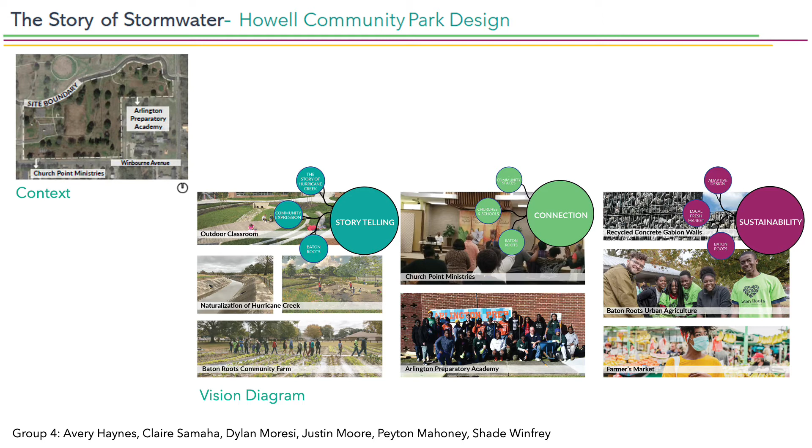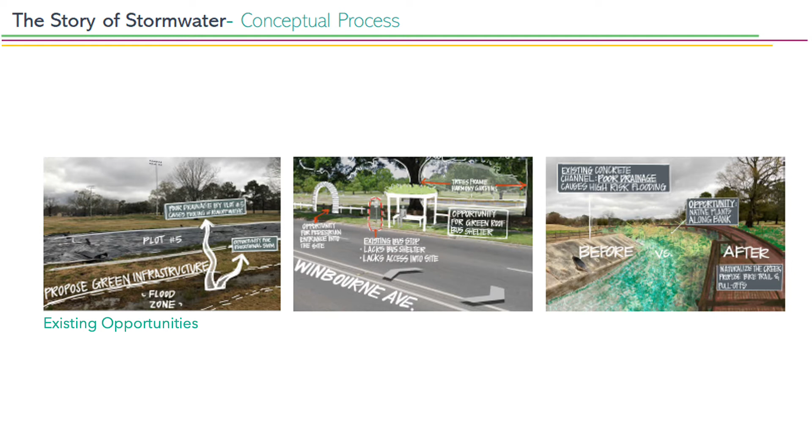The last is Hurricane Creek, its naturalization, which will provide opportunities for recreation like bike lanes and fishing, as well as improving water retention, slowing stormwater, and being a place for native plantings.

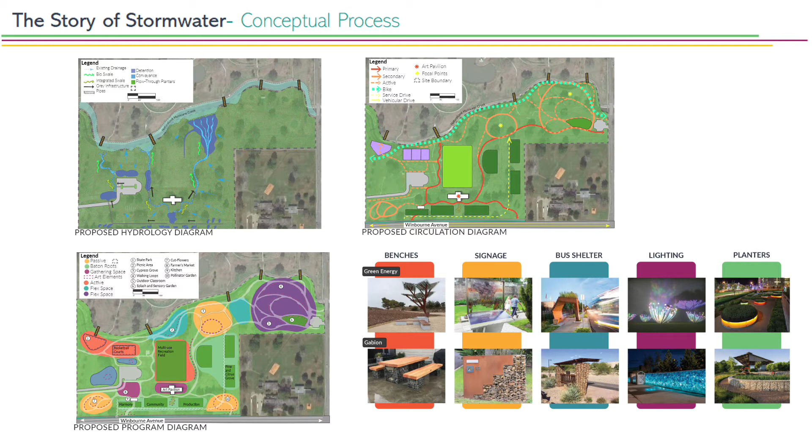The art matrix shows options for green energy and gabion furnishings and how they could be used throughout the site.

Our master plan is a composite of these layers of hydrology, circulation, and programming through an iterative process with various changes, taking feedback from community members and representatives from BREC, Baton Roots, and the NEA.

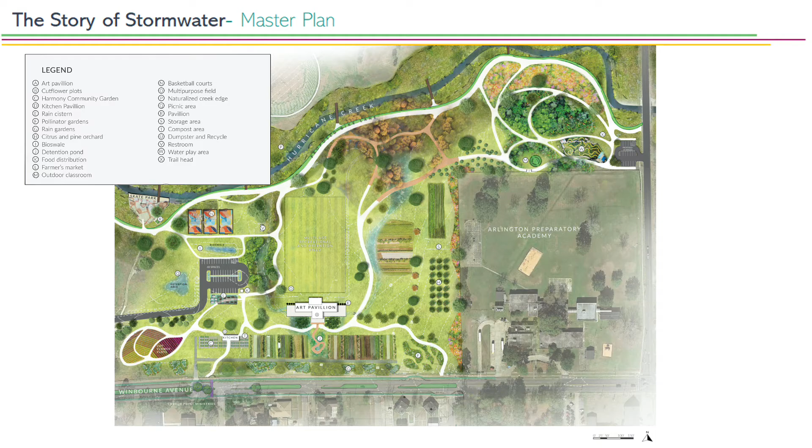We've arrived here. The Story of Stormwater master plan design utilizes dendritic forms to convey storytelling, connection, and sustainability within the space. We've divided the master plan into 3 sections.

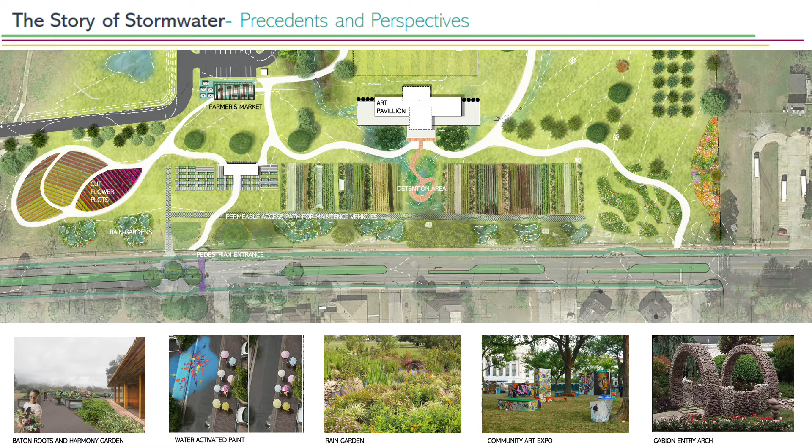The farmers market could also include a community art expo, and we would really like to focus on a pedestrian entrance, which would engage Church Point Ministries as well as members of the neighborhood wanting to access the park.

Our design proposes the art pavilion nestled between Winbourne, the Baton Roots plots, and the multi-use recreational field. This would give second-story users a great view of a soccer game or of the community plots.

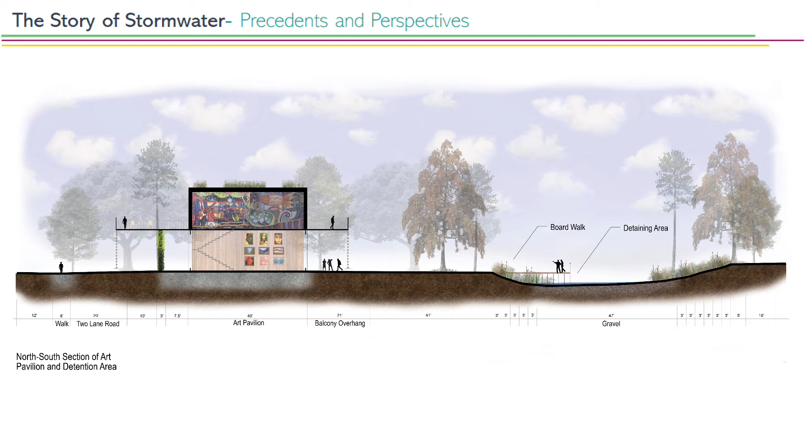There's also a nice detaining area with a boardwalk that separates Baton Roots' community plots from their production plots. The second section of our master plan shows a more active side.

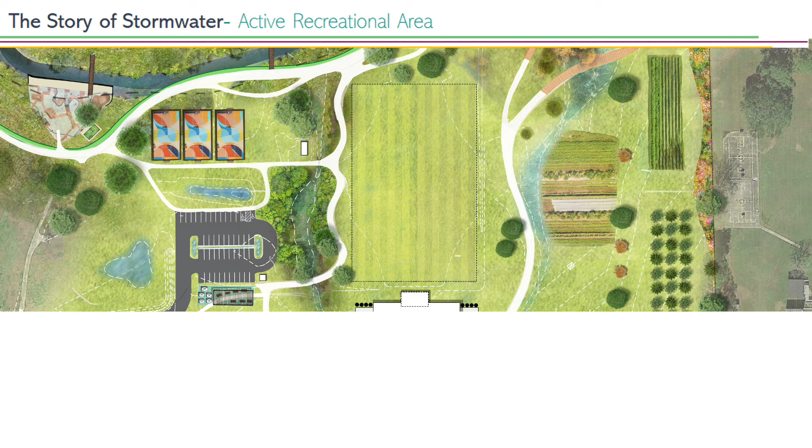There's the multi-use recreational field that's existing, as well as some additional basketball courts, a really cool skate park with a teen pavilion, and to the right, more Baton Roots plots, but with a focus on production.

Most times, parks focus a lot on young children, but they always forget about the teens. This section of the park would really like to highlight a space for teens in a cool art skate park.

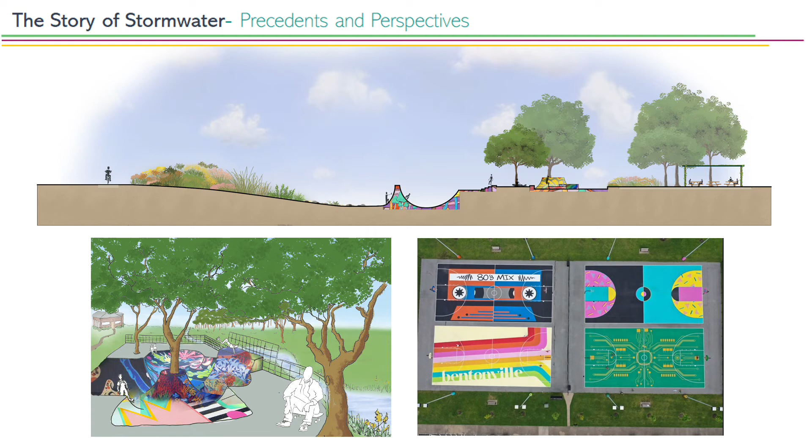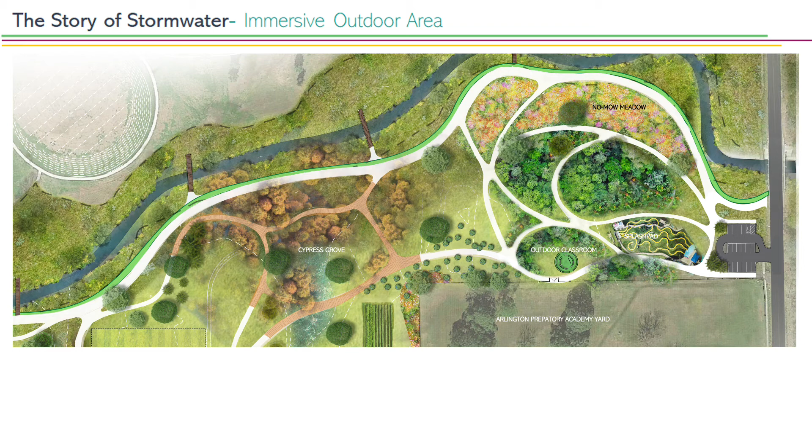would serve as a space to engage the Arlington Preparatory Academy students, and a splash pad could also be a fun way to engage children and learn about stormwater management.

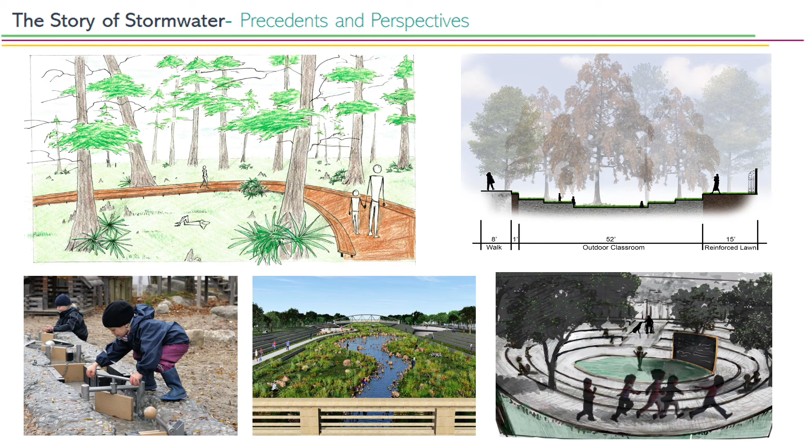Our focus on connection drew us toward the street. Making Winborn safer and more effective for pedestrians, bikers, and bus riders was our goal.

We've provided a road diet to make the vehicular traffic more efficient. Bus transit will have designated spaces for pull-off.

Stormwater management along the street is going to include native plantings and phytoremediation that's going to clean the polluted road. Art would include painted stripes and painted planters to engage and employ opportunities for local artists.

And pedestrian and bike access is going to be much safer, widening that space for pedestrian use.